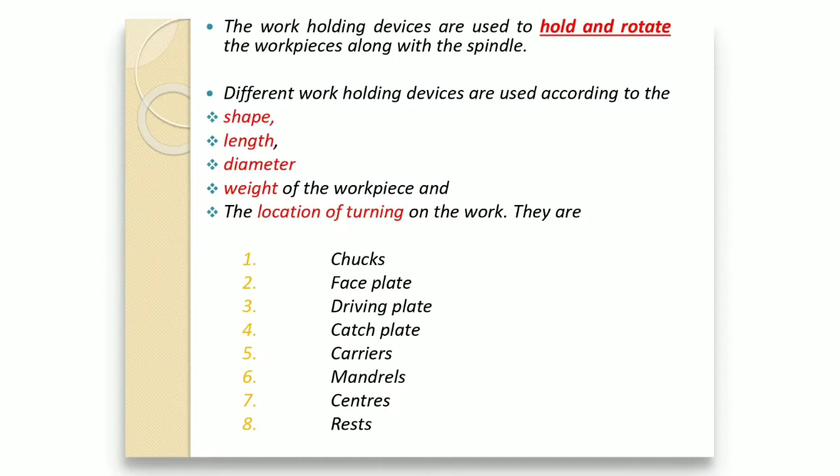The following devices are going to be selected: chuck, faceplate, driving plate, catch plate, carriers, mandrels, centers and rests.

So today we are discussing chucks. A chuck is a work holding device which is used to hold a shorter length of workpiece having a larger diameter and irregular shapes which cannot be held by the between-center method.

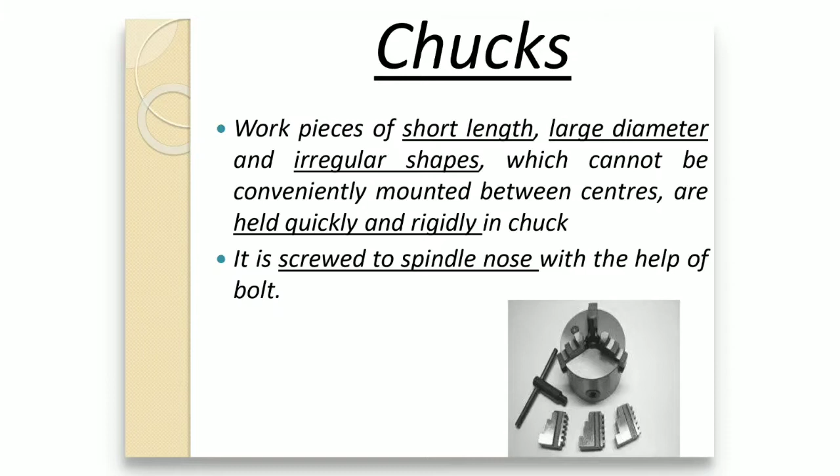And the chuck is going to hold the workpiece very quickly and rigidly. The chuck is clamped or screwed to the lathe machine spindle by using Allen screws. In some machines, the chuck is directly screwed to the lathe machine spindle according to the design of the machine. Okay, let's move on to the types of chucks.

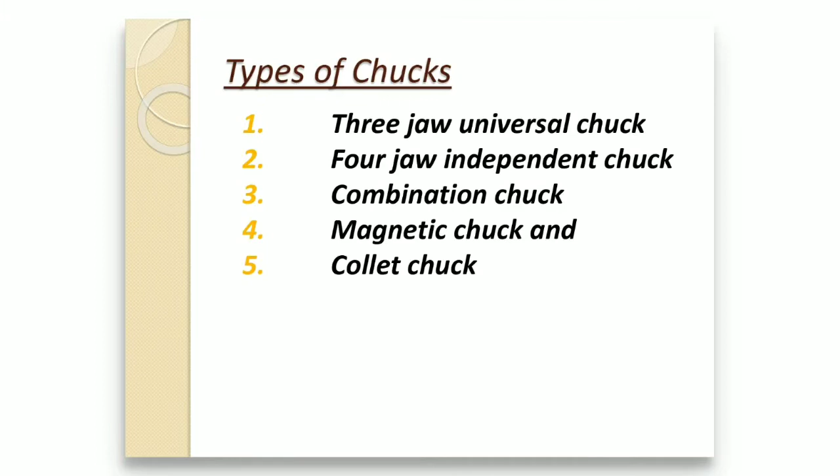There are most commonly five types of chucks used. First one is the 3-jaw chuck or universal chuck. Second one is the 4-jaw independent chuck. Third one is the combination chuck, fourth one is the magnetic chuck, and fifth one is the collet chuck. You can also add another one, the drill chuck, which is used for secondary operations like drilling, held in the tailstock, but we'll discuss it later on.

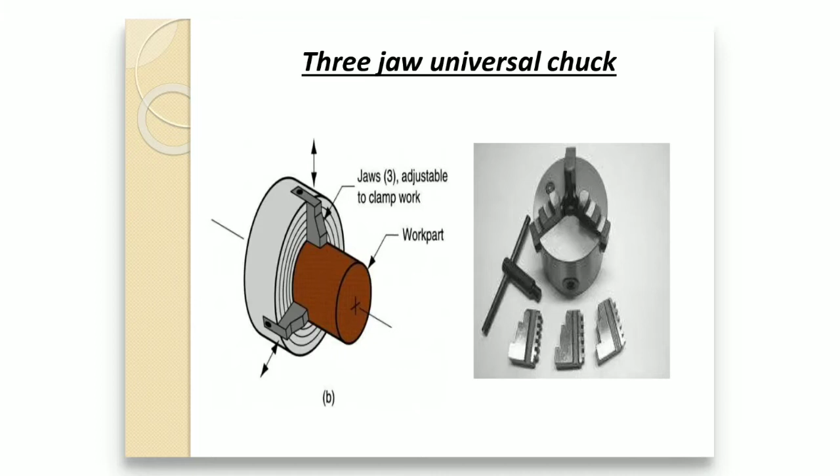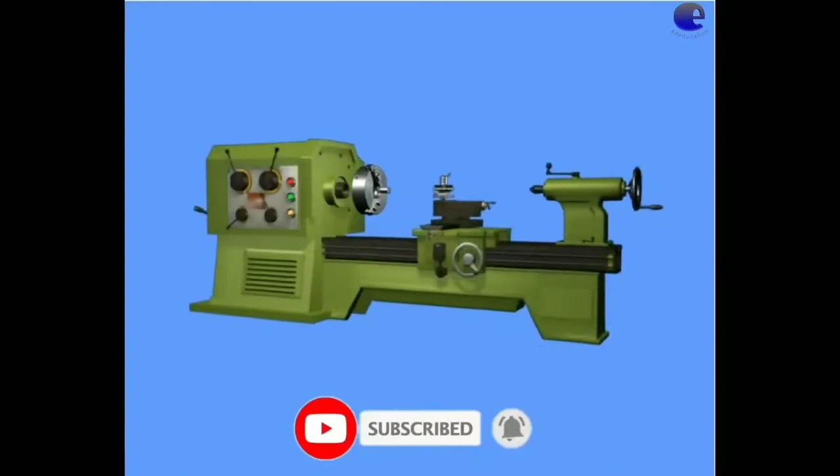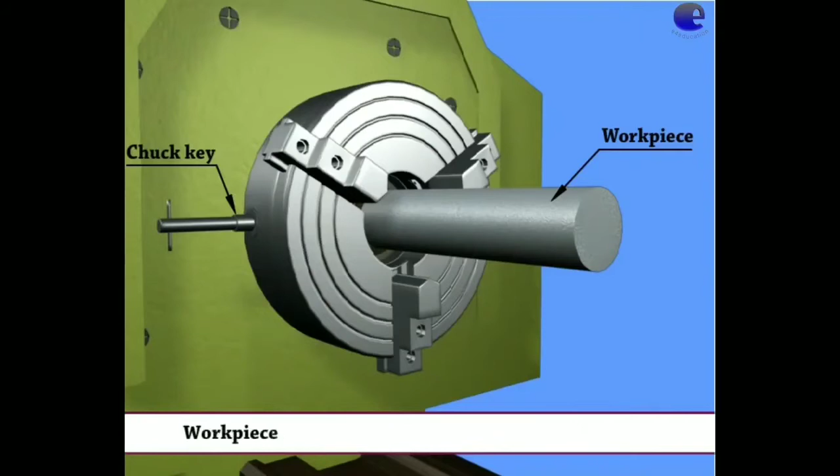We'll first discuss the 3-jaw universal chuck. You can see how it looks. As the name indicates, 3-jaw, it has 3 jaws, and all 3 jaws are operated by using a single key. That means by rotating a single screw using a chuck key, all 3 jaws will move towards the center and hold the workpiece at the lathe machine center.

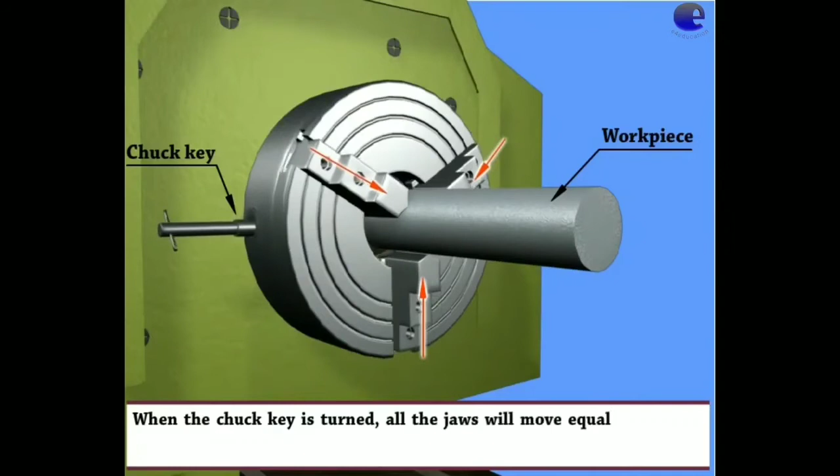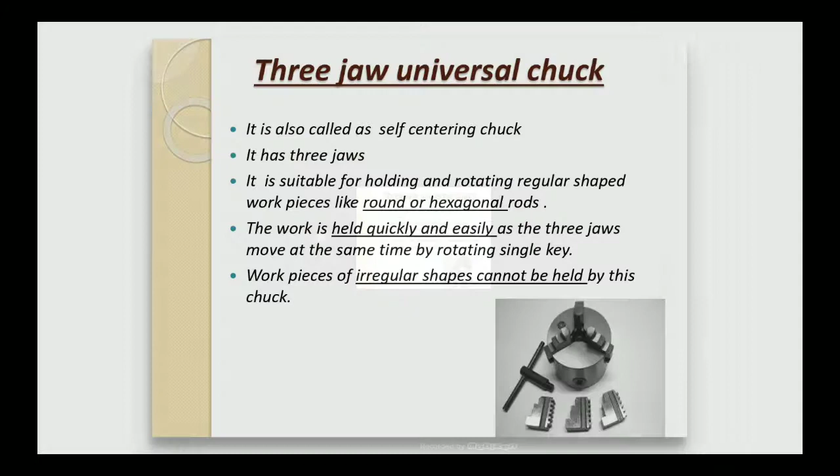That's why it is called a self-centering chuck, because it holds the job at the lathe machine center. All 3 jaws move simultaneously inward and outward as you rotate the chuck key.

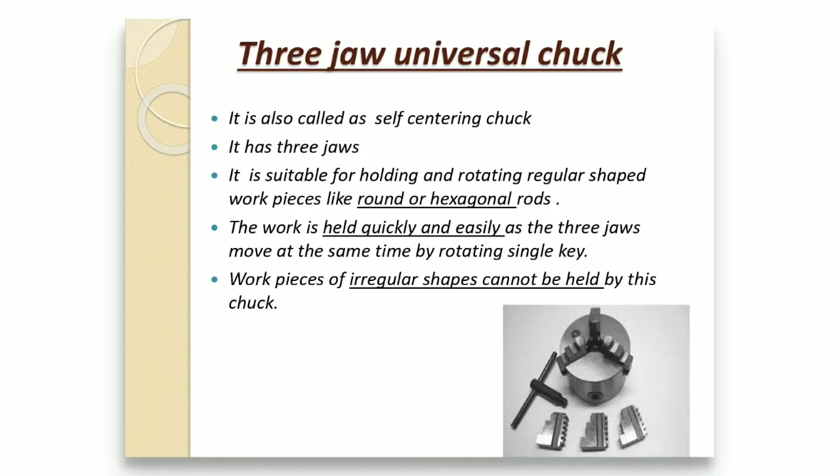It is suitable for holding round and hexagonal workpieces. The work is held quickly and easily as 3 jaws move at the same time by rotating a single key. Other irregular shapes cannot be held by the 3-jaw chuck. So it is also called a universal chuck.

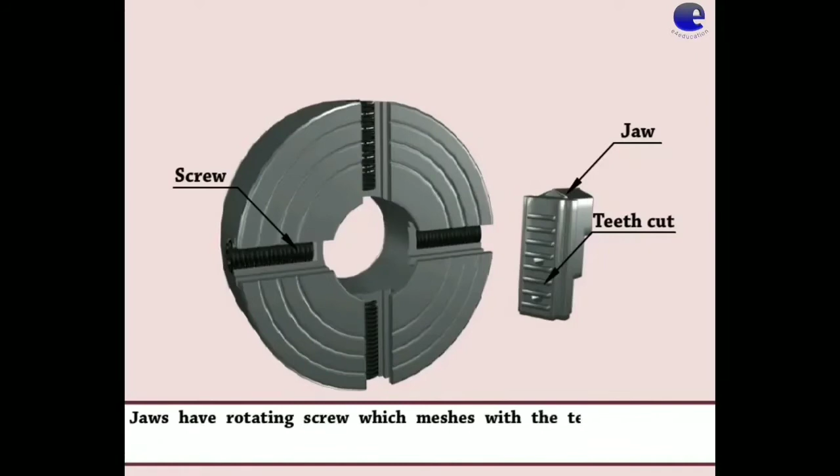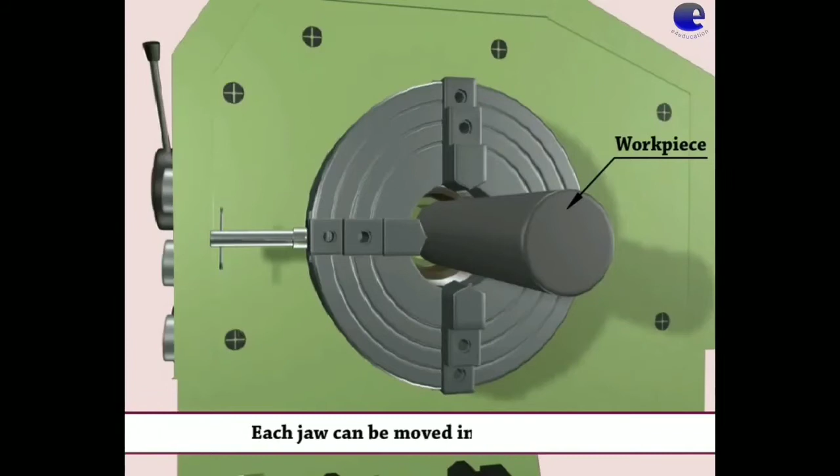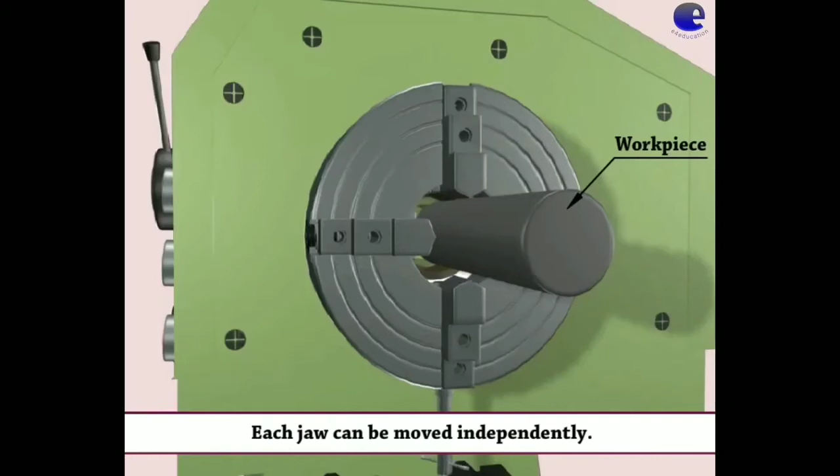Next, the 4-jaw independent chuck. As the name indicates, it has 4 jaws, and all four jaws have independent movement inward and outward. Each jaw independently and separately moves by rotating a separate screw given for them with the help of the chuck key. Because of this, we can hold round jobs, square jobs, and other irregular shapes of workpieces.

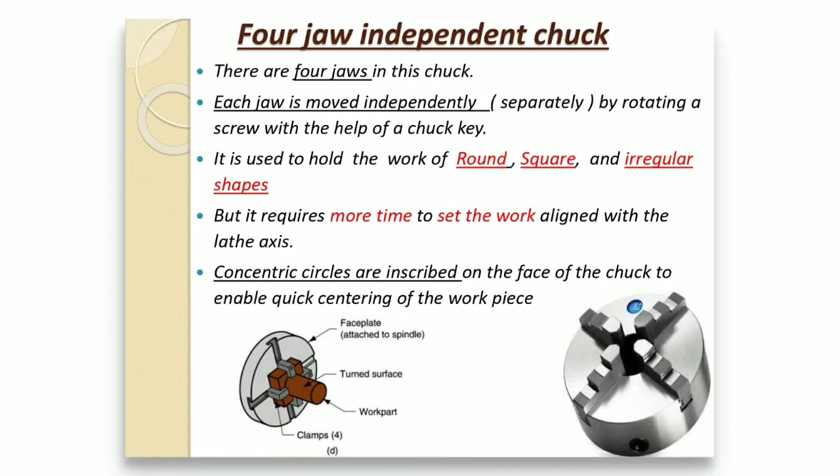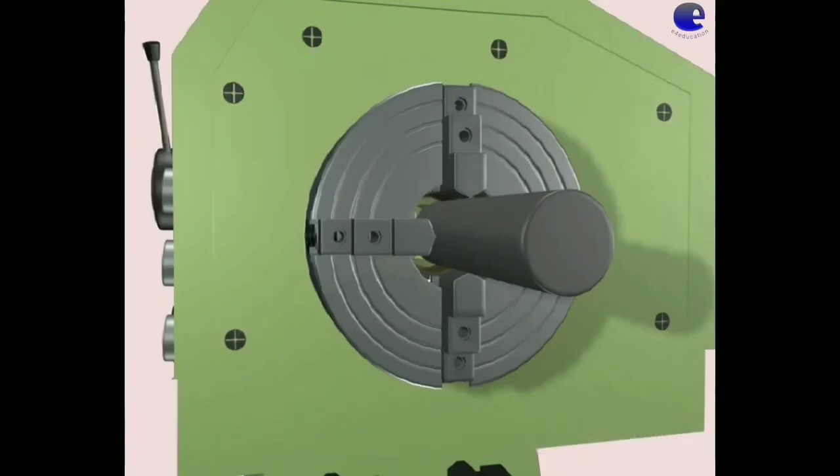But it requires more time to hold the workpiece and align it to the lathe axis. Also, skilled labor is required to align the work axis to the lathe axis. To make this easy for a cylindrical job, the face of the chuck has concentric circles scribed on it, so that it helps clamp the workpiece to the nearest circle. Then we can use a dial indicator to align the workpiece center to the lathe center.

If you see the difference between the 3-jaw chuck and 4-jaw chuck, by naked eye we can say that the 3-jaw has 3 jaws and the 4-jaw has 4 jaws. The 3-jaw is called a self-centering chuck, and the 4-jaw is called an independent chuck. In the 3-jaw chuck we can hold round jobs and hexagonal jobs, but we cannot hold irregular shaped jobs. In the 4-jaw chuck we can hold round jobs, square jobs, and also irregular shaped jobs.

Additionally, in the 3-jaw chuck we cannot make an eccentric turning operation, but in the 4-jaw chuck we can make an eccentric turning operation, because we can move the job wherever we require. So we can make a center offset and perform eccentric operations. These are the main differences between the 3-jaw chuck and 4-jaw chuck.

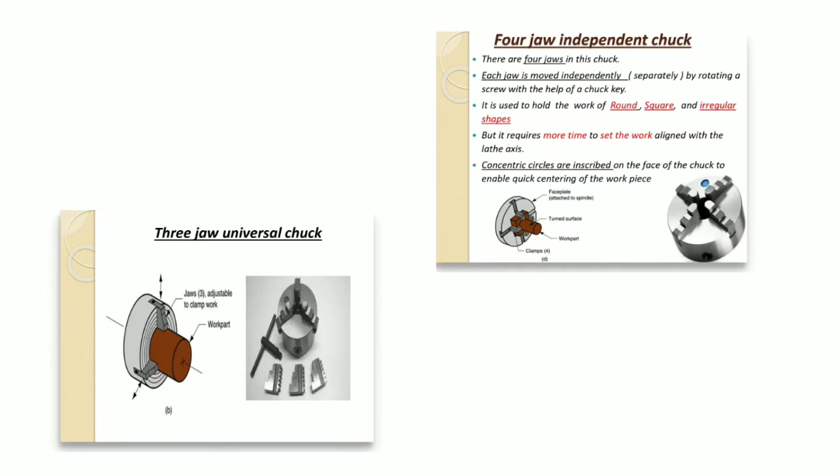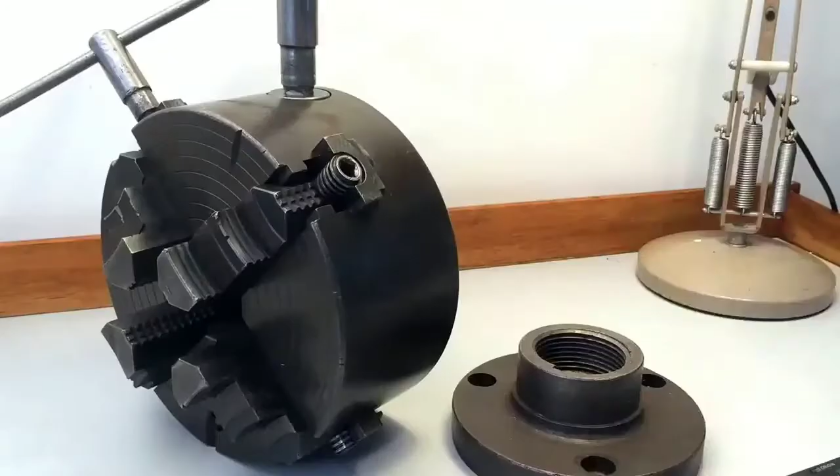Let's move on. The next chuck is the combination chuck. As the name indicates, it is a combination of the concept of the 3-jaw chuck and 4-jaw chuck, meaning it works as both a 3-jaw chuck and a 4-jaw chuck.

As in the 3-jaw chuck, all 4 jaws simultaneously come and hold the workpiece, and as in the 4-jaw chuck, all 4 jaws move independently. Initially this chuck has 4 jaws, and for rotating them it has back side individual separate screws, so that we can move them individually and separately.

Later on, once the job is set, for clamping a second job a separate special key is given at the back side, and by rotating that key we can move all the jaws at a time, simultaneously moving outward and inward. This type of chuck is used in production work where repetitive work is applied, so we can use it for quick and fast clamping, without needing to set the workpiece every time.

To save work holding time, we use the combination chuck. For example, if we have 100 similar jobs, for the first job we use the 4-jaw concept, with each jaw separately rotated to hold the workpiece through the job.

When the first job is complete, we use the back side key to rotate the jaws outward simultaneously, remove it, and insert the second job. Then we rotate the key again so all 4 jaws come inside simultaneously, just like in the 3-jaw chuck concept, saving work holding time.

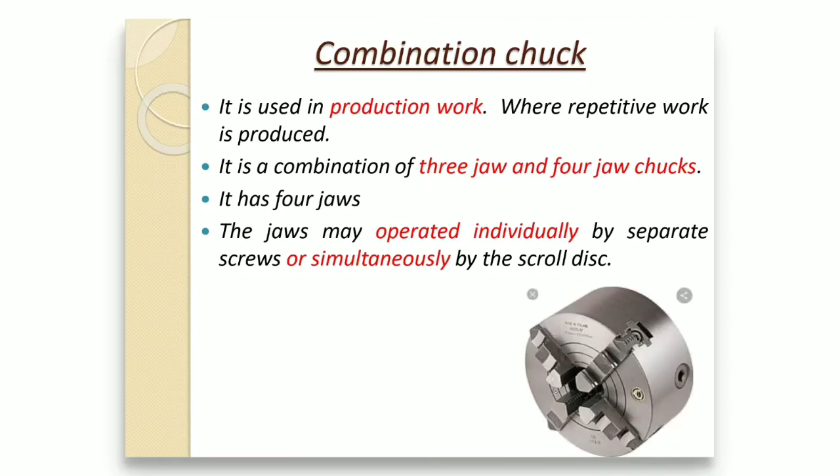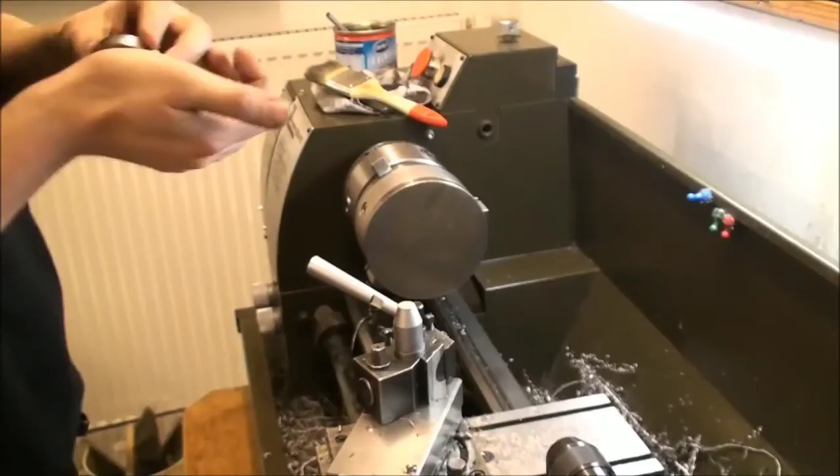Next is the magnetic chuck. It is used to hold small and thin workpieces where light work is needed, work that cannot be held by the ordinary chuck, 3-jaw chuck, 4-jaw chuck, or combination chuck, because holding with those jaws would fold or bend the sheet or workpiece, and it cannot withstand the tool load. So such jobs are held by the magnetic chuck using magnetic force.

Here they use magnetic energy to hold the workpiece. This type of chuck is specially used for only ferrous material, because a magnet holds only ferrous material. As shown in the figure, the magnetic field is introduced under the workpiece and it is held.

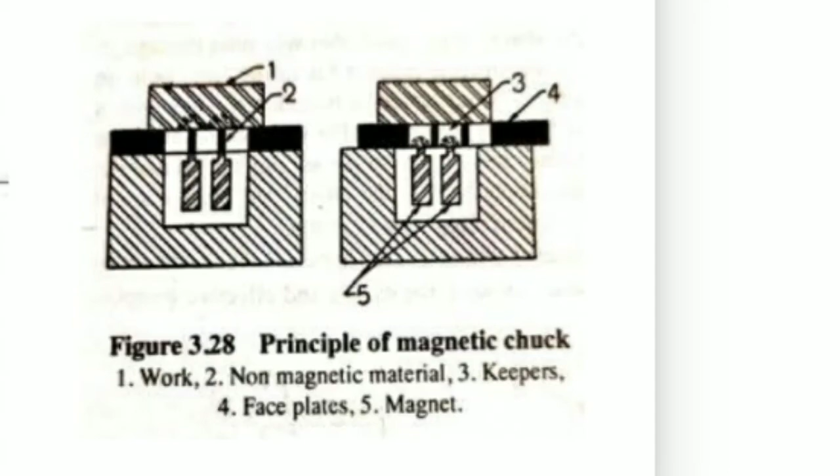By rotating the lever, a non-magnetic material comes between the workpiece and the magnetic coil, so the workpiece is declamped. When you want to clamp it again, you turn the lever, the non-magnetic material moves aside, and the magnetic field enters the workpiece and holds it. This type of chuck is specially used for making thin, light workpieces.

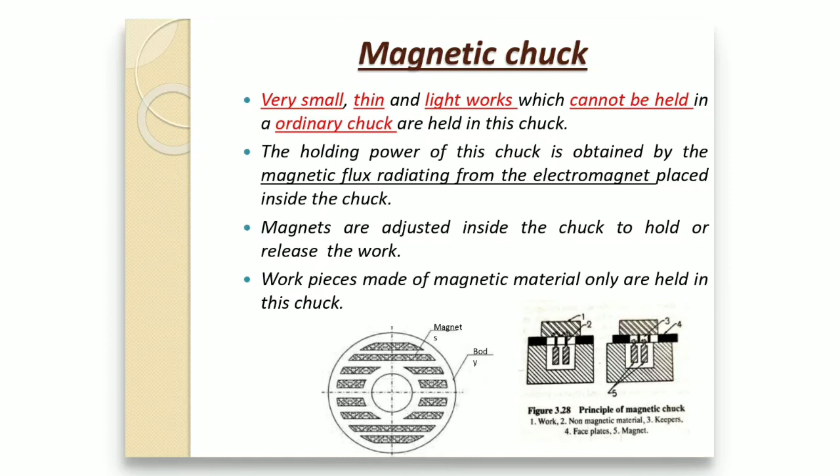Next is the collet chuck. It is used in capstan lathes and automatic lathes for holding bar stock in production work. In production work, they feed the bar behind the headstock through the spindle, and it gives quick setting and accurate centering.

The collet chuck gives quick, accurate, and fast setting, so the clamping time is very less. The collet chuck has a cylindrical bushing known as a collet, made up of spring steel, with slots cut lengthwise on its circumference, so it holds the workpiece with more grip.

For different sizes of workpiece, we require different holding collets. For example, collets are available from dia 1 to dia 25, so we can hold workpieces of various diameters within that range, and for holding those components you have to use different collets.